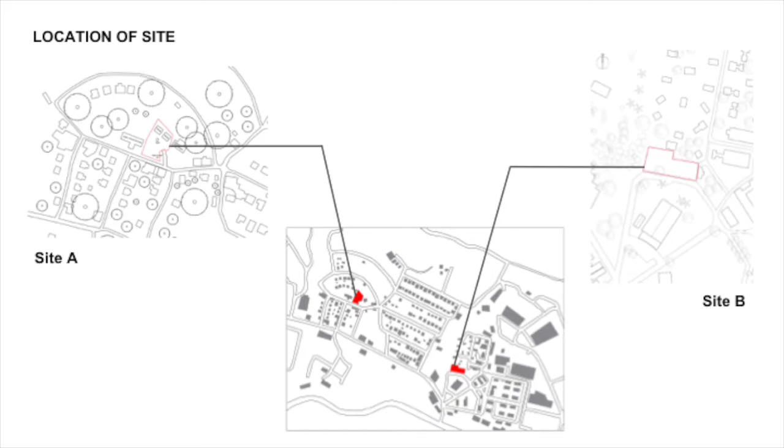This leads to a quest of hope for the patients in the settlement. Therefore, the leprosy centre was then known as the Valley of Hope. There are two proposed sites to construct the VIC: Site A in the inner part of the settlement, while Site B can be seen upon the entrance.

To access the Valley of Hope, Jalan Hospital serves as the primary access as it is the only main road that connects the entrance of the settlement. Upon entering, the secondary circulation naturally leads to Jalan Lembah, where the nurseries are and crowds gather for trading. Along the secondary circulation, there are multiple narrow roads that act as tertiary circulation to access the proposed sites. The traffic condition is very straightforward.

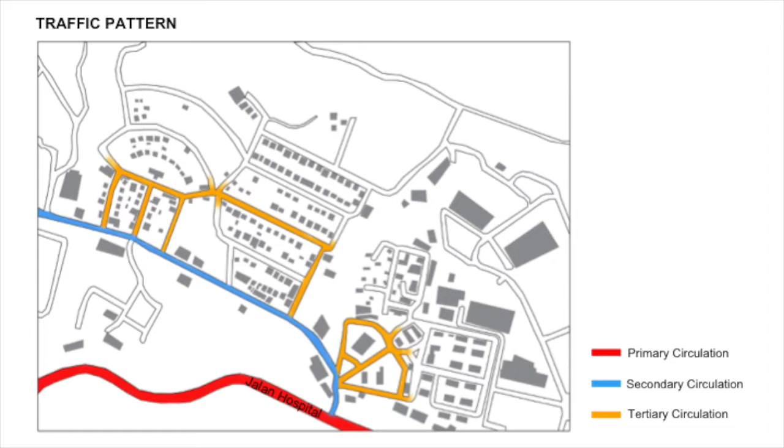Sungai Buloh has a smaller crowd in general compared to bigger cities like Kuala Lumpur. The main roads A and B, which are primary and secondary circulation, have nurseries along the side of the road. There are no specific car parks, so vehicles are forced to block part of the road when they stop to visit the nurseries, affecting vehicle movement and causing congestion.

B can be more congested than A as B has a narrower road width. However, during weekdays, B would be less congested than A as vehicles are not allowed to enter. C is where the newly introduced visitor center is, and it's been attracting visitors, causing a slight increase in congestion compared to the once non-congested condition.

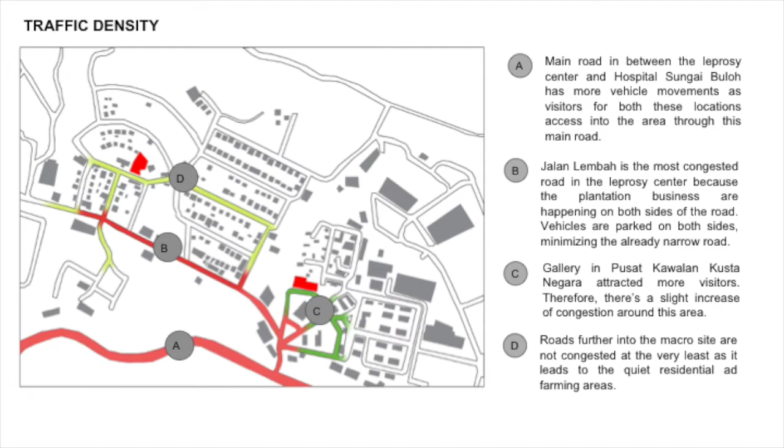D are the roads further into the macro site where the plantations are. They are mostly accessed by walking or motorcycle since the roads are very narrow and not well maintained, so it is at the very least congested. The Valley of Hope can be accessed by pedestrians through the site, but there are no pedestrian walkways, which can be very dangerous.

Based on the SWOT analysis, the place is very easy to access from every direction. But there are a few weaknesses such as the lack of pedestrian walkways, the lack of zebra crossings and safety signs, congestion due to narrow roads, and not even a signboard to direct visitors around the area.

There might be business opportunities where food businesses can sell their products to users around the area. However, the unsafe walkway for users and inconvenience of parking location, as users have to park beside the roads, creates a threat.

By zoning the site, there are plantation, community service, residential, religious and culture, commercial, visitor center, and leprosy medical care zones. The zoning shows that the Valley of Hope is pretty much a self-sustaining community, making their own source of income and also necessary services a community should have.

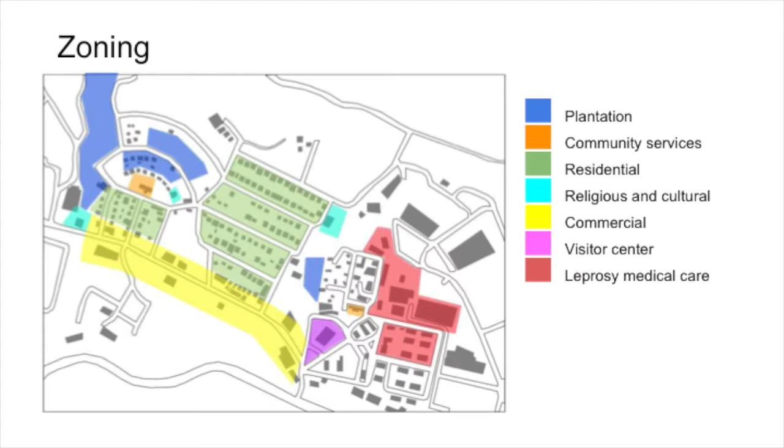The nodes are spread throughout the whole settlement, showing that the area was very free-flowing for the leprosy patients. They were able to access every corner of the settlement freely and plant an identity and purpose for themselves anywhere within the settlement. The area around Valley of Hope has been occupied mainly by healthcare science-related buildings.

The settlement was the first medical institution and has successfully advanced in medical and science. Therefore, healthcare sciences have gathered around the area since the settlement's establishment until today.

Looking back at the proposed sites, Site A and B, there are existing structures that should be taken into consideration before designing the VIC. For Site A, there are two existing houses that function as showrooms, a tree at the center, and also a tree stump. These structures are to be kept on site, so the VIC should be adjusted to also respond to the existing structures.

For Site B, there's a row of shops occupying almost the entire site. These shops are allowed to be demolished as long as the functions are replaced into the VIC. Therefore, when designing the VIC on this site, the interior spaces are more restricted.

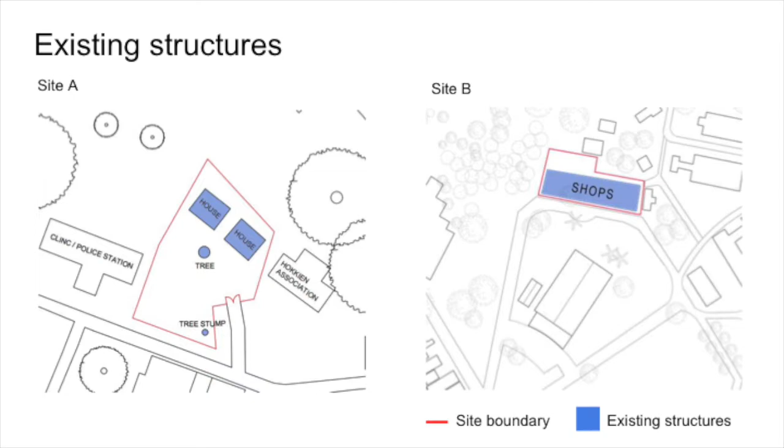Based on SWOT analysis, we can see that there are various activities that can be carried out around the site. The identity and characteristics of the local buildings are well maintained, and they have their own self-sustaining facilities as a community. However, this will create heavy traffic due to the increase of human activities around the site.

Though the knowledge and history of the site will be spread to the visitors, the rapid development might influence the origin of the site context.

On the way to Site A, the user will walk through the residential, commercial, and plantation area. This allows the user to experience the lifestyle of the site before entering the VIC.

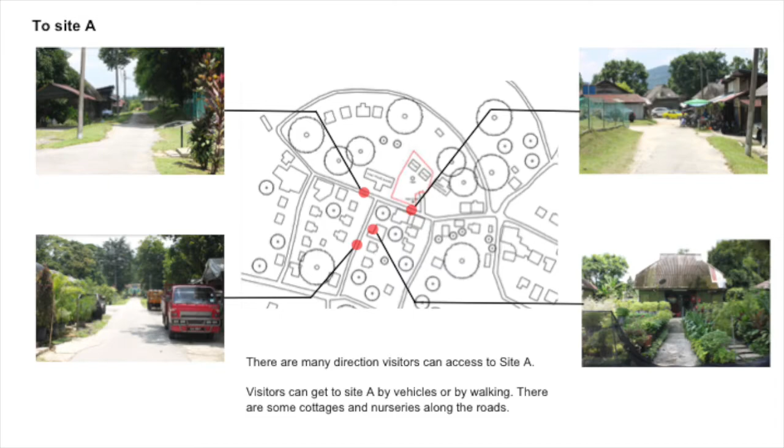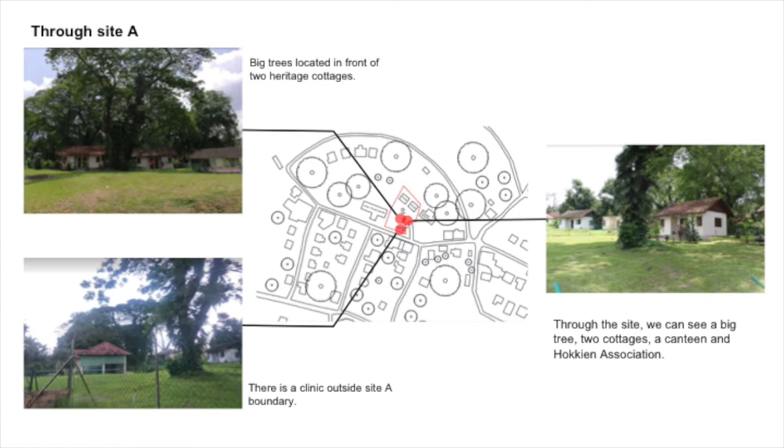In the site, the user will find shade from the big tree. The two heritage cottages would also become the focus of the users as they are the only structures within the boundary. Looking out from Site A, the user would have a view of the abandoned cottages that used to be the ward for leprosy patients.

There is also a Hokkien association right next to the site and shop lots at the front of Site A. Site A is a full package when it comes to physically witnessing the life of the leprosy patients and their living conditions at the present.

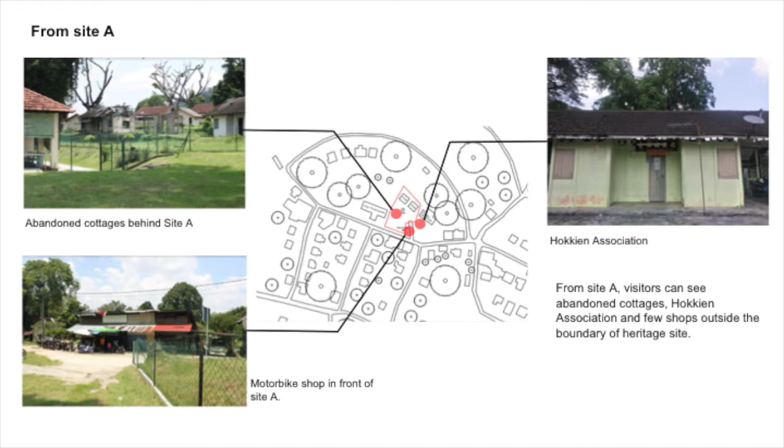Based on SWOT analysis, Site A is a major attraction location around Sungai Buloh. It has lesser noises as it is located away from the main road. It will be a very suitable location for weekend lodging, or maybe act as a vacation and relaxing spot for tourists.

However, Site A lacks organization, and future development to the site would affect the existing panoramic scenery. On the way to Site B, users will walk through the main roads that have views of the existing visitor center as a focus due to its size and the newly renovated element that contrasts itself from the site, such as the lift beside the Pusat Kawalan Kusta Negara.

The contrasting elements would affect the user's impression of the site. Within the site, the views are limited to the shops run by the local communities and also the main road in front of the site.

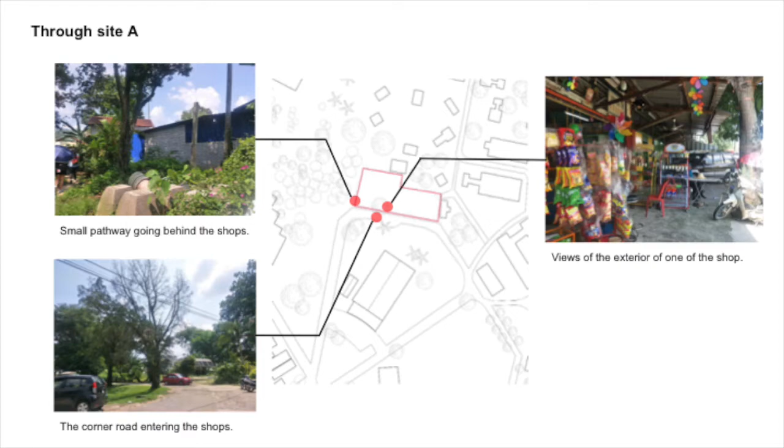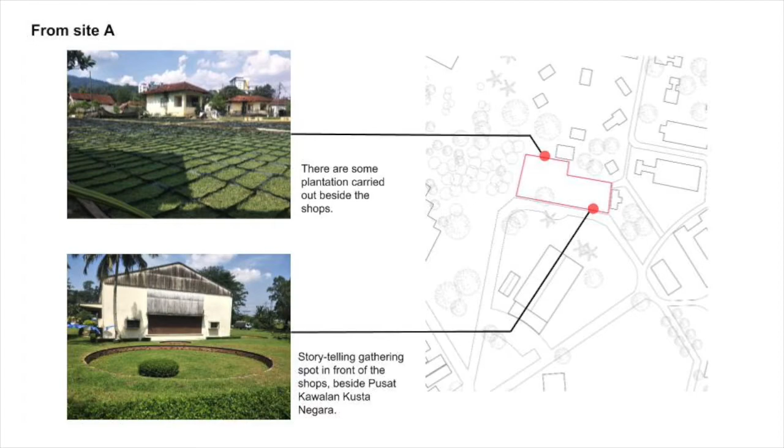Walking around the shops, the user can also experience a view from the pathway leading to the back of the shops. Looking out from the site, the user can witness the plantation activities and also the storytelling gathering point beside the Pusat Kawalan Kusta Negara.

Based on SWOT analysis, Site B is a good location due to its good accessibility. There are greenery views of the surrounding as well. Site B has the potential to act as a center point of the community. However, the noise level around Site B is higher and the site is not visible from the outside as it is blocked by the visitor center.

Noises within the site are mainly formed by humans and traffic. Majority of the human noises are formed by the crowd around the nurseries along Jalan Lembah where people gather around, especially locals, to buy plantations.

Human noises are formed around the visitor center as well, where the history of Sungai Buloh settlement can be found, which would attract many tourists to gather around that area.

Traffic noises are focused around the nurseries where cars, lorries, trucks, and motorbikes would gather at the small compound area, which result in traffic congestion. There are also traffic noises upon entering the site through the highway as there is a parking lot right in front of the visitor center.

Based on SWOT analysis, the busy street will actually attract crowds. However, this will lead to congested roads with many vehicles creating loud traffic noises. Widening the current narrow road might reduce the traffic congestion and also increase the traffic noises, but the excess noise will also cause disturbance and inconvenience to the residents. Despite that, poor road planning will also affect future business opportunities.

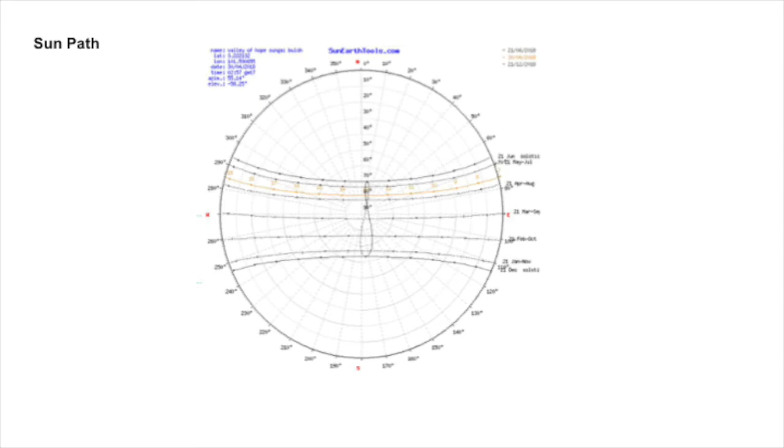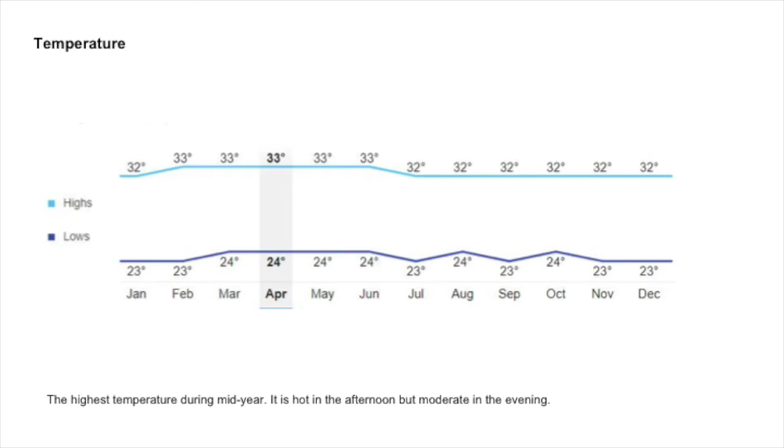Valley of Hope, Sungai Buloh is located near the equator, as Malaysia's climate is categorized as equatorial, being hot and humid throughout the year. The highest temperature of the site is 33 degrees Celsius in the afternoon, while the lowest temperature is 23 degrees Celsius at night.

Most of the wind comes from the south side of the site. The strength of this climate in the Valley of Hope is that it is consistent throughout the whole year. Thus, there are lots of nurseries carried out around the site, as the climate provides sufficient sunlight for plantations.

Although this climate maximizes sunlight for plantations, mostly the hot air coming into the area results in high average temperature, as Malaysia has a hot and humid climate. Besides, the empty land creates opportunities for a suitable location for high-rise buildings to provide shades for the area.

Visitors are encouraged to explore the site for a better understanding, but there are lesser crowds in the afternoon due to the hot weather, which would affect the nursery's businesses.

The living conditions of the residents are rather relaxing. Most of the elderly people who prefer not to move to the city live in the old chalets as they are already used to the lifestyle over time and wouldn't want to adapt to a new environment. They are able to live independently with their self-sustaining plantation businesses.

Whereas there are still some leprosy survivors who are still living in the ward and are being taken care of by the nurses.

The common activity done by the locals is to visit the nurseries as there are large varieties of plantations sold in the nurseries along Jalan Lembah.